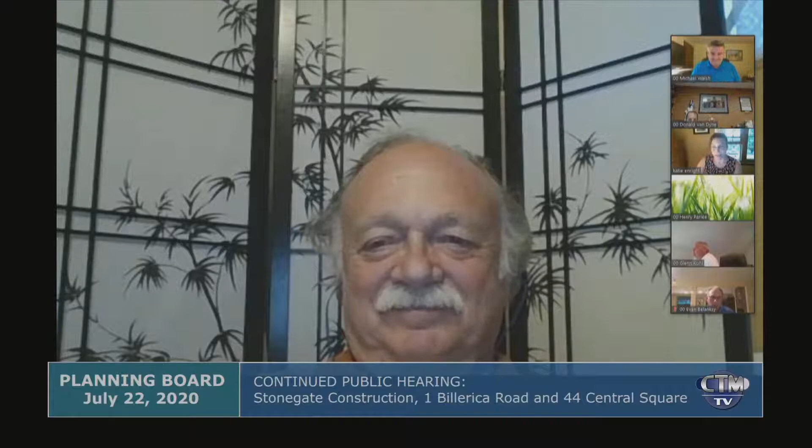Colleen, if it's easier I can share my screen with the presentation, or it's exactly the materials that you have up, whichever is easiest for you. It's always easier when you do it, Katie. Okay, all right, let me bring up - we just got to make you a co-host. Oh, it's already letting me do it, I think. Thank you. Yep, all right, so this is the plan that you saw at the last hearing.

I just want to update you and talk about a few changes since the last hearing. This is the colored rendering that was presented at the last hearing. Since then - and this one might be a little easier to see - this is a plan we prepared for the Historical Commission, which we were in front of for partial demolition of the Fisk House, and also originally we were there for the demolition of the outbuilding.

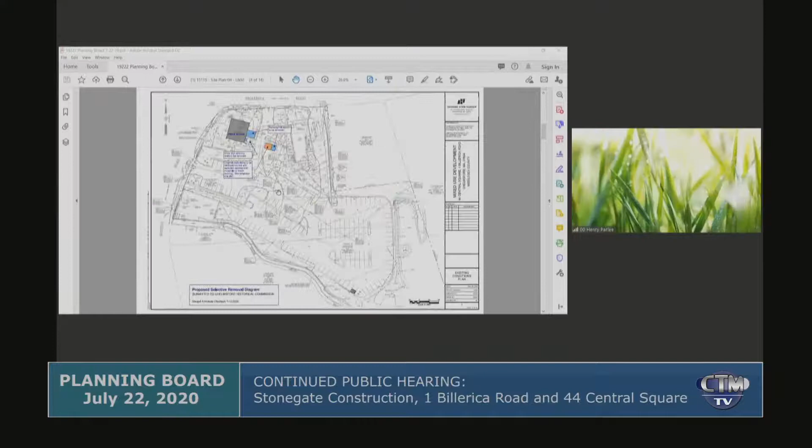Since the project was submitted to the planning board, we have gone back to Historical Commission and they have approved the demolition of these light blue areas on the back of the Fisk House. We have agreed to move the original portion of the outbuilding on the subject site, and what we would do is remove the non-original section, which is the light blue section pointed to here.

If I go back to this plan - I know it's a little complex without the colors - it shows you where we're moving the outbuilding. The original portion of the outbuilding will be moved to this area adjacent to the Fisk House, with access through the door from this sidewalk in this location. So we're essentially moving it from here to this area, between the parking lot and the old retaining wall that we're going to keep in place as the project moves forward.

This plan also shows the addition on the back of the Fisk House to create some ADA access, and I presented those plans to the board last week. These are the plans we'll be going back to the Historic District Commission with at the beginning of August. This is the existing area coming off the rear of the Fisk House.

Again, this area in light blue is what's being removed from the Fisk House. This is the face that faces Santander and the little outbuilding. Another view of that piece to be removed.

As we move forward, we're showing you the proposed addition on the back of the Fisk House, basically a top-down view. Again, this is a nicer view shed.

Essentially what we're doing, and we worked with Dan Barton, an architect with Maugel Architects who has done a lot of these historic structures, is we wanted to create a ground level entrance where people could get in from the parking lot and, at some point in the near future, enter the basement floor of the Fisk House. There would be some sort of lift or elevator incorporated when the interior of the Fisk House is renovated.

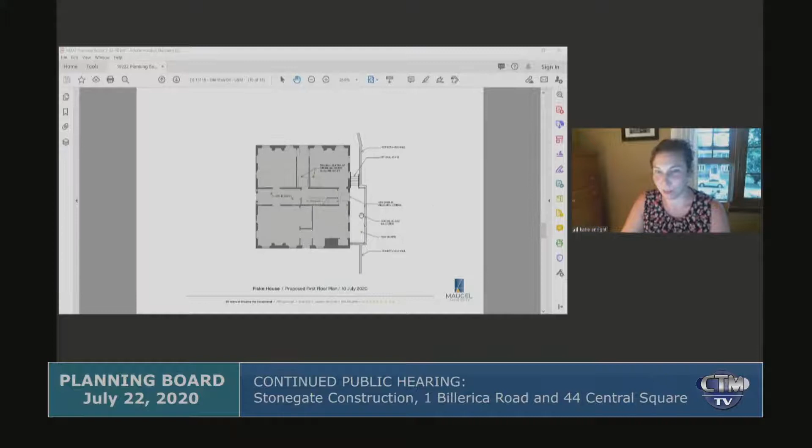It took me a couple minutes to kind of figure out how this all works. So if you need me to stay here a little bit longer, I'd be happy to go back to this.

But we received approval from the Historical Commission for the demolition of the rear of the Fisk House and the demo of the newer portion of that outbuilding. They worked with us, and we're happy that we were able to move the outbuilding somewhere close to the Fisk House. These are just some of the materials we'll be using to match the existing materials on the Fisk House today.

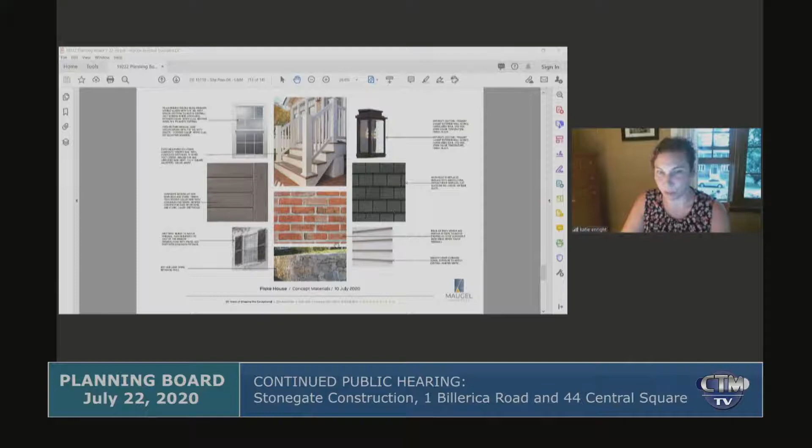To go back to my layout and materials plan, I have started to incorporate the comments. I didn't produce an entirely full plan set as we just started Conservation Commission last evening, and I wanted to make sure boards and commissions were not seeing multiple iterations of plans at the same time.

So what I've provided here is an update to show the new addition on Fisk, to show the movement of this outbuilding, to show that we're able to maintain the existing retaining wall here, that both the HDC and the HC were looking for us to keep.

I've started to incorporate some of the comments we received from the fire department asking for this curbing to be sloped granite. There were also comments from Christina Papadopoulos, your town engineer. I received a detailed list of comments about 1.5 pages long, a lot of which asked for painted arrows to be added in the field. I've added a significant amount of stop bars, stop signs, and do-not-enter signs throughout the site.

You can see I've also taken off the arrow that showed this would be an out to Billerica Road. It's only an in, which is what it is today.

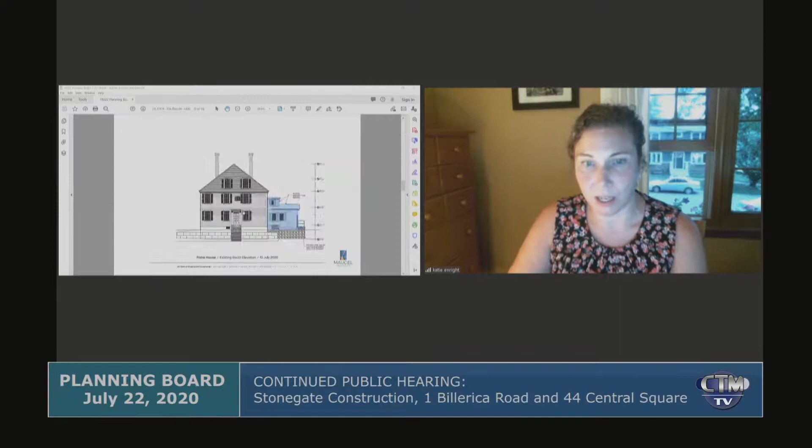And the last plan that I provided you was a request from a member of the board. It's a little easier to understand. Please correct me if I'm wrong, but what I heard was that the board would like to see a plan that shows elevation-wise how all of the buildings, or a significant amount of buildings in the center, line up with one another.

So this is a flat comparison based on elevations throughout the center of town, showing where the Gristmill building, the Chelmsford Center Hotel building, the CCA, the Fisk, the Oddfellows, and the new multifamily building fit if you were to look at them on a purely vertical plane next to one another. It's hard to say there's really a view shed here, because you wouldn't see all of these buildings ever on this plane together.

Also, the Chelmsford Center Hotel building, the Fisk House building, and the Oddfellows building are right up against the street, while both the multifamily building and the Gristmill building are more than 200 feet away from the street and behind other structures when you're looking at them. So this is basically a cut or profile of how these buildings compare to one another on a vertical scale.

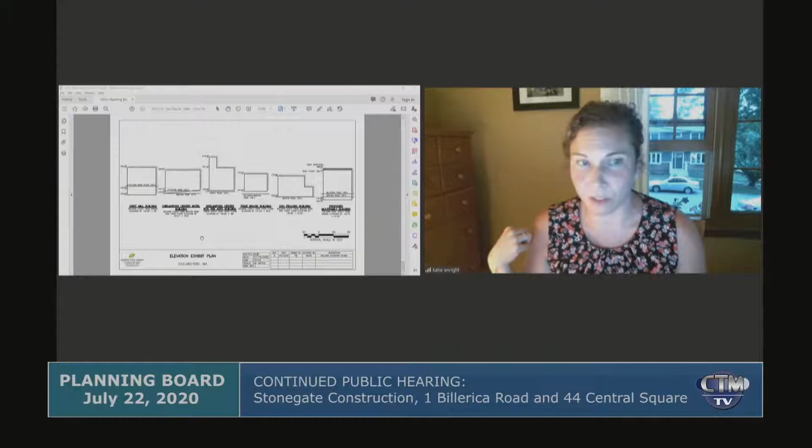You can see the Gristmill building's garage elevation is 134, and the first floor elevation is 145.5, going from left to right. The Littleton Road Plaza, where the Java Room is, is at about 152. The roof of the Gristmill building would be at an elevation of 190.

Moving to the Chelmsford Center Hotel building, in the central square -- still calling it Boston Road, which I was just educated on regarding what part is actually Boston Road versus Central Square, so this will get changed -- the face that faces Oddfellows and Fisk is about 137. On Littleton Road, the Chelmsford Center Hotel is about 142, and the top of the roof is 184.9. This is a combination of building elevations I took from the field survey and what was constructed out there.

The Chelmsford Center Hotel, the CCA, the Fisk, and the Oddfellows were all surveyed by the survey crew that did the survey for the Gristmill, because we used some of these elevations when we were talking about heights with the Gristmill building.

And then you can see the proposed multifamily building. We're way down at 123.75 for the garage floor. Boston Road elevation is 130. Billerica Road is 136. The top of the roof is 185.17. And then by the time we add the screening to screen all the mechanicals, the screen is 188.5.

So this is a very flat kind of interpretation of the different heights of the buildings. This is what I heard for a request, so please correct me if I'm wrong.

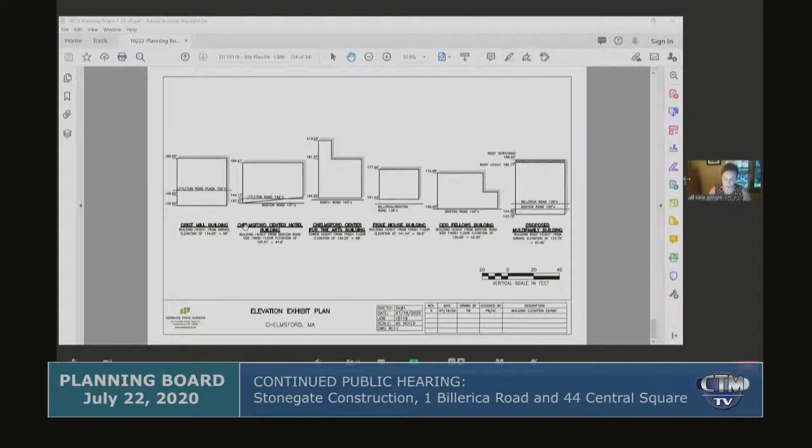I'm looking at this point to really work towards a revised plan set that tries to holistically capture as many of the comments or questions as possible. I know we'll also be updating the landscape plan with some of the comments heard at the last hearing. And certainly if there's additional landscaping comments, I know we will be taking out the pin oaks and replacing those with different types of trees.

And at the request of Mr. Rigney, we will be looking at the area where we are looking to remove trees on the northeast side of the parking lot, where there's a little bit of grading, and adding some vegetation in that area in a future plan.

One last thing, we have been working and meeting with David Hedison at the Chelmsford Housing Authority, and we will have a proposal before this board in time. We're hoping in time for the next meeting with the board to discuss the inclusionary housing piece.

We have had multiple conversations with Chelmsford Housing Authority just to get their feedback as to what we're proposing. And certainly we understand that this board is the deciding factor on anything inclusionary housing, understanding that we do need to get some information from the Housing Advisory Board, which hasn't met yet.

We've been working with Evan to try to get them together in a meeting. But in the meantime, we have been meeting with Chelmsford Housing Authority to essentially work through some of our proposals. So we're hoping to get that to you in time prior to the next hearing for review. So with that, I would like to turn it over to the board.

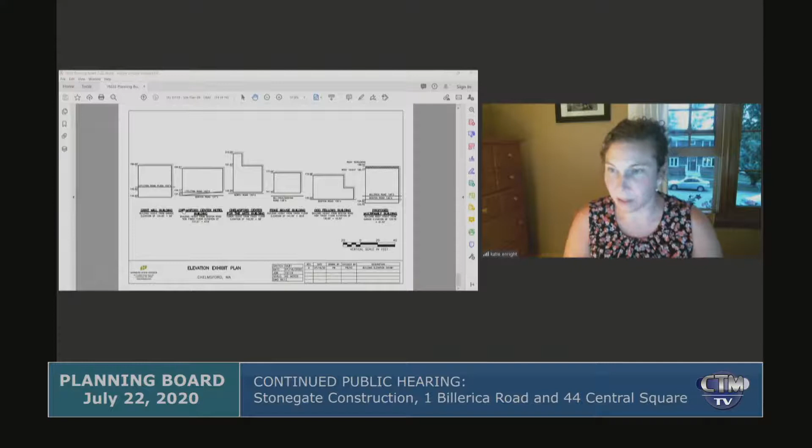Okay, thank you, Katie. Does Melissa want to speak before we open it back up to the public? No, I think Katie pretty much gave an overview of everything that we had outstanding. So just the board's comments this time, Mr. Chair.

Okay, great. So before we go back to the public, because it's still a public hearing, we want to go around the board and just see what comments have been made on Katie's drawings, and especially that profile drawing. If anyone has comments, Dawn, you want to start with Dawn?

Let me unmute. Hold on. No, you're on. Oh yeah, no, I don't have any issues. I'm just happy that they were able to get together with All Saints Church.

Okay, Glenn? I think I'm fine with it. Looks like a good project. Okay.

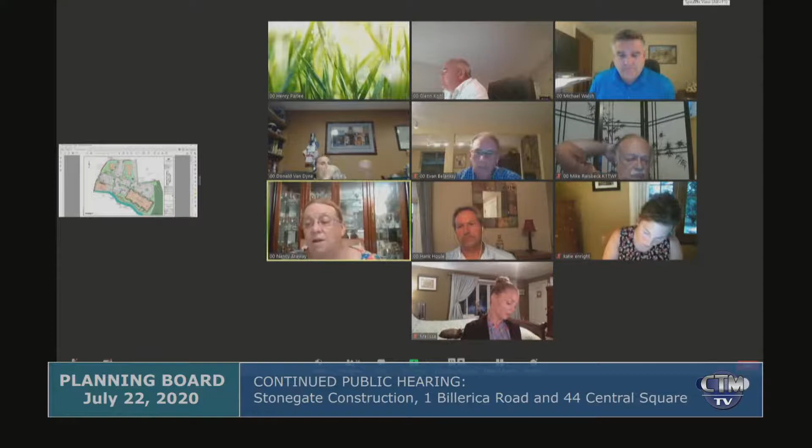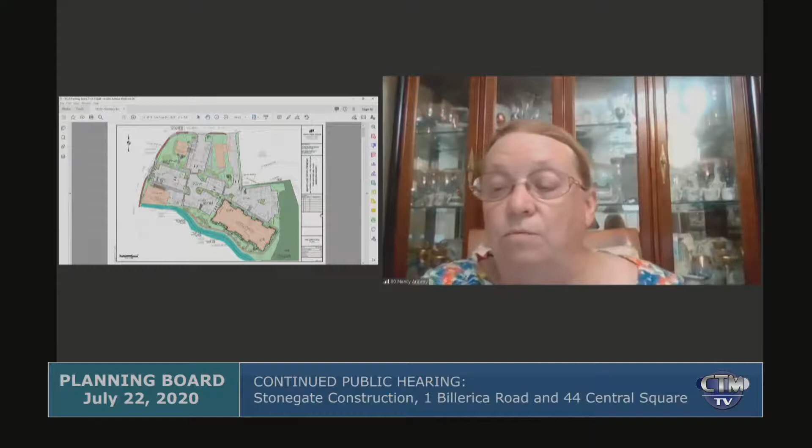Nancy? Yeah, first I'd like to thank Katie for the elevation exhibit plan. It's exactly what I was trying to ascertain. And I'm very pleased to see that the height of the building in terms of the top level height is very consistent with other buildings, and actually does not exceed two of the six buildings in question. So yes, thank you. Okay.

Hank? I like the project myself. I'm still not a fan of the 4 stories. I mean, just because we had older buildings that are a little high with steeples, I just want to stick with the code and go with 3. But besides that, I'm fine.

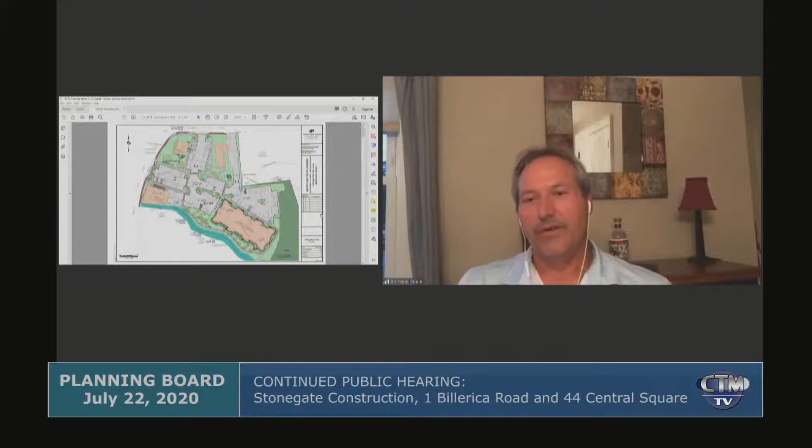Mike? I'm relatively happy with it. Nothing at this point. I think a lot of what we had talked about last time was addressed.

Okay, all right. So yeah, there's still a lot of items and comments. I think we've got everyone on the committee. Tim's not on yet. So I think just my two cents on it, I think there's some comments that have not been addressed yet. I know you guys are working through it, and we're going to see.

So that's what we'll remind the public who are on the call before we open it back up, that the drawings are not 100% complete. They have not incorporated our comments from the last meeting. And Katie, correct me if I'm wrong, as you mentioned, you will be coming again back in August.

And with the final, would that be the final set of drawings, and you're looking for a decision at that time? Or will it just be continued into the next 2 meetings?

I think what we're looking for is to go back to Conservation Commission one more time and provide them with a new set of drawings that hopefully encompasses most of these comments, and also Historic District Commission and this board. We're hoping that at the next meeting we'd be comfortable enough to have Evan start working on a decision that we could speak to at the end of August, if the board feels comfortable at that time.

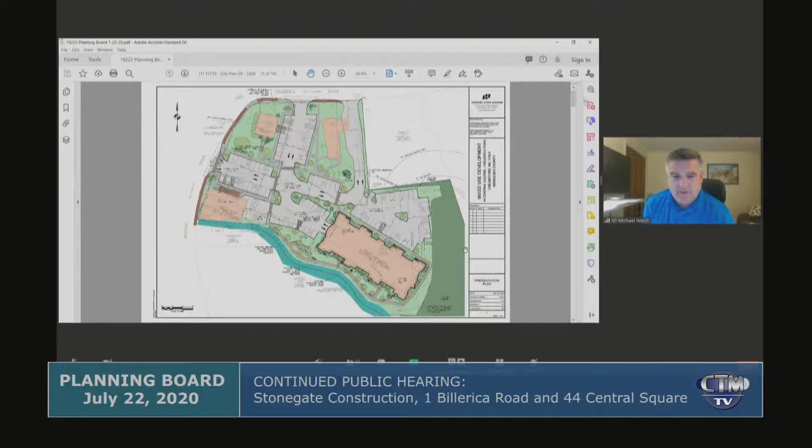Since this is a continued public hearing - yes, Don? I do have one more question. Has there been any further discussion regarding crossing over the brook and connecting the property with Town Center? There's not. Is there plans? There's not at this time. If that's a request of this board, certainly we would bring it back to the client and have that discussion.

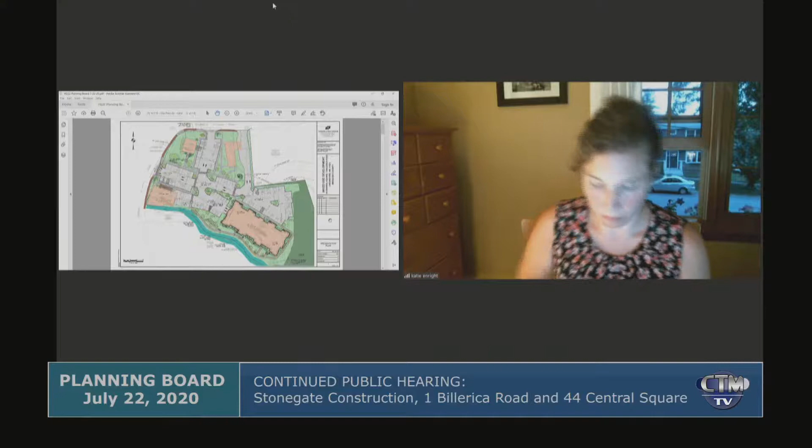Katie mentioned something about internal signs, stop signs, directional signage, things of that nature. My only comment is that previous planning board members, once the Santander branch was up and running, provided feedback among themselves and received feedback from the community that there was a lot of regulatory directional signage on the Santander project - a lot of stop signs, do not enter signs, things of that nature - and essentially the feedback was that they were sign pollution and not very aesthetic. So my suggestion is internally, maybe they're not needed. I can understand at Boston Road and Billerica Road, but I would encourage the applicant to minimize those internal directional signs, and I offer that for consideration to the board.

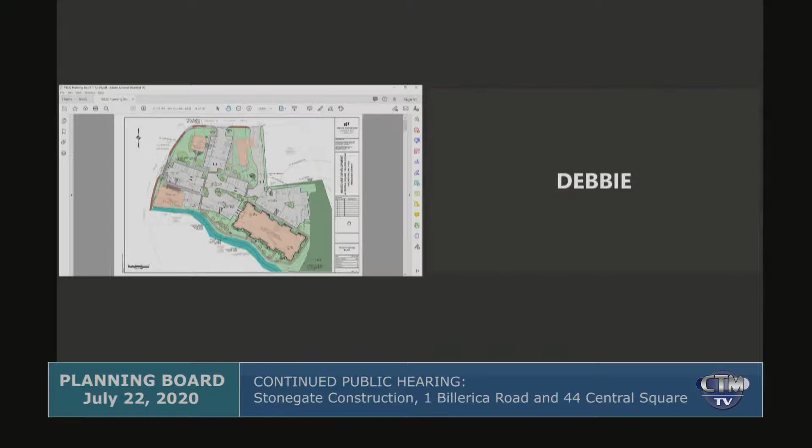Final two comments: similar to Gristmill 1, I'd be interested in seeing a more robust pocket park, maybe some brick pavers, things of that nature, again similar to Gristmill 1. Maybe there's a constraint with the riverfront area and the Conservation Commission on that.

Final comment, piggybacking on Donald's comment on the bridge - this is an item of interest to the Center Village Master Planning Committee. I would strongly encourage this board to further explore a bridge connection. I believe two of these properties will be held maybe in common ownership. The owner of Fishbones has a rear parking lot, and it would be of great benefit to the brick walk to see if a bridge connection can be made somewhere between the rear of the Fishbones parking lot and this project. That's all I have.

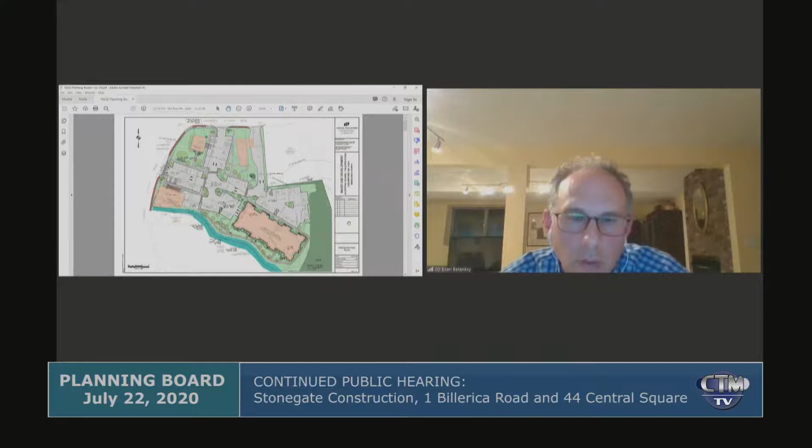And to the public, just to remind you, when you do speak, please state your name and address, and understand that the drawings are not complete with our comments. There are a few comments that board members have made at previous meetings, and the neighbors as well, and I don't think they've all been incorporated in the drawings yet, or even attempted to be looked at. The engineers still need to finish that, so please try not to repeat the same concerns you had at the last meeting.

We'd appreciate that. Colleen, are there people waiting? Colleen, you're on mute. Having technical difficulties, my screens are on and off. There's nobody in the queue for questions. There was in the chat room - they asked if there's public input. Someone would like to speak. Is it Nancy?

Hi, my name is Nancy Arena. I live at 90 Westford Street. I've been in Chelmsford for 40 years, and I would just like to make a suggestion.

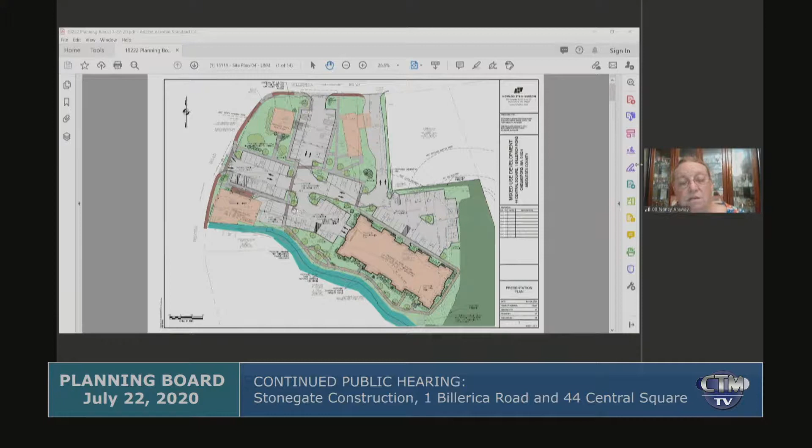Can you reposition those dumpsters so that you have better access for your delivery trucks? Can you take a look at that, please? Yes, thank you.

Okay, any other comments? Not hearing any. Do we have a motion to continue to the next meeting - what's the date? August 12th? Yes, August 12th. So moved. Second. All in favor? Evan, do I need a roll call on this, was that a final? No. Okay, all in favor? Aye. Any opposed? Okay.